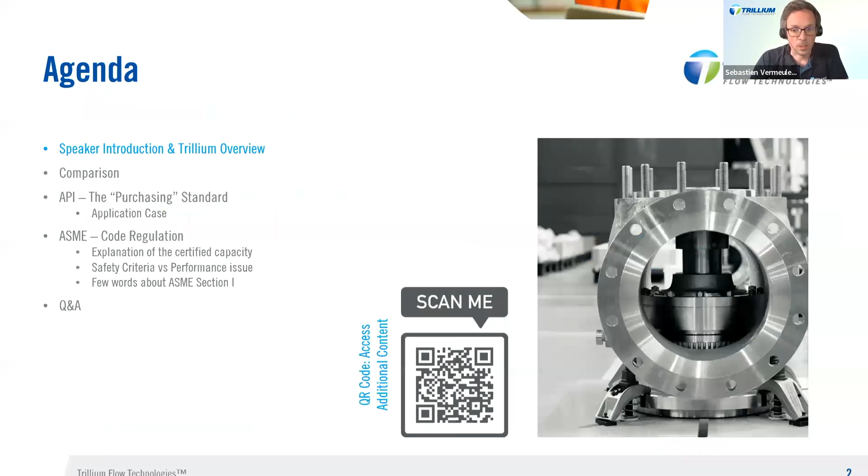After a brief introduction of both of us and the Trillium entity, we will detail the applicable parts and sections of the standard and code applicable for PRVs. We will allow you to get a better understanding of the pros and cons of API. Then Benoit will explain how to pass the National Board Product Certification. To finish, we will close this webinar with our traditional Q&A session.

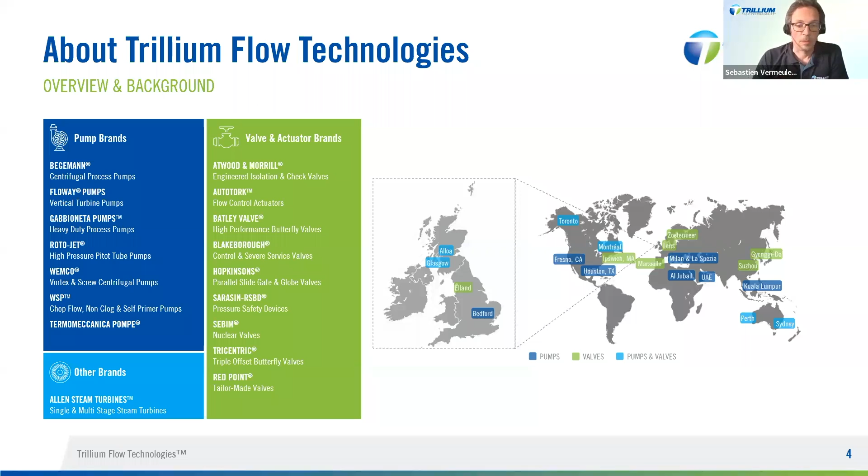Trillium Flow Technology has a long heritage of innovation spanning 190 years. We are continuously adding new products and services to make your process more efficient and productive. Let's take a look at a few of the most important dates for Sarasin. So Sarasin celebrates 175 years of experience this year.

In 1848, the company was created. Mr. Deschamps created a forge mill. Then in 1956, we manufactured our first spring-loaded pressure relief valve in accordance with ASME standard. Our first customer was Total Energy. So yes, there is a kind of French synergy.

In 1983, Sarasin was sold to the US company Anderson and Greenwood, who were the leading global manufacturer of pilot-operated relief valves. It was at this period Sarrazin & Co became Atco Sarrazin and manufactured the Atco pilot-operated pressure relief valve. Another important date is 2013, because we targeted a new market, the power market, manufacturing the first ASME safety valve. It's not the topic of the day, but it was also an important date for Sarrazin.

Trillium probably doesn't ring a bell because it's a new brand, a new group, a name that was created in 2019. Sarasin was part of CIRCOR before, for 20 years, from 1998 to 2018, before joining Trillium. So it's all the same brand, but under a new group name. We made the acquisition of Red Point in 2020, mission critical valves, and more recently, Termomeccanica pumps, who joined the family in 2021.

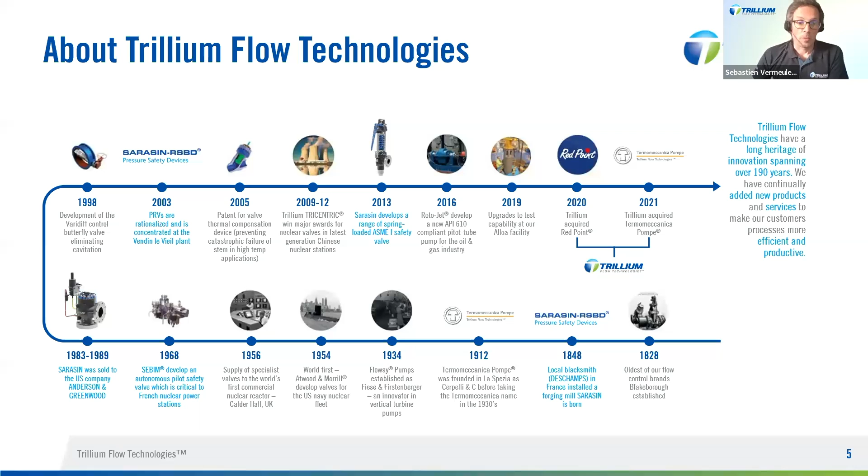So let's detail now the applicable parts and sections of the standard and code applicable for PRVs.

So this is to give you a global overview of the difference between API and ASME, a comprehensive view before going more in detail. In comparison with ASME, the API standards are not mandatory by law and are primarily used in the oil and gas industry, that is to say oil refinery, petrochemical facility, gas plant, liquefied natural gas, LNG.

ASME is not within the scope of API. API is intended to be a supplement, but not supersede the ASME regulation. They are recognized guidelines, and most customers may mandate compliance since API standard may be incorporated in the specification as a reference. Basically, we can say 100% of US EPC require a PRV that comply with API standard. Some other countries simply ignore it.

There are 100 API publications. Of course, during this webinar, we will only focus on those which have a direct impact on pressure valves. In total, there are 4 major ones.

API standard 520, which is split into 2 separate parts: the first part for the sizing, the second part for the installation. API standard 521 gives us estimation of the noise level from the point of discharge to the atmosphere.

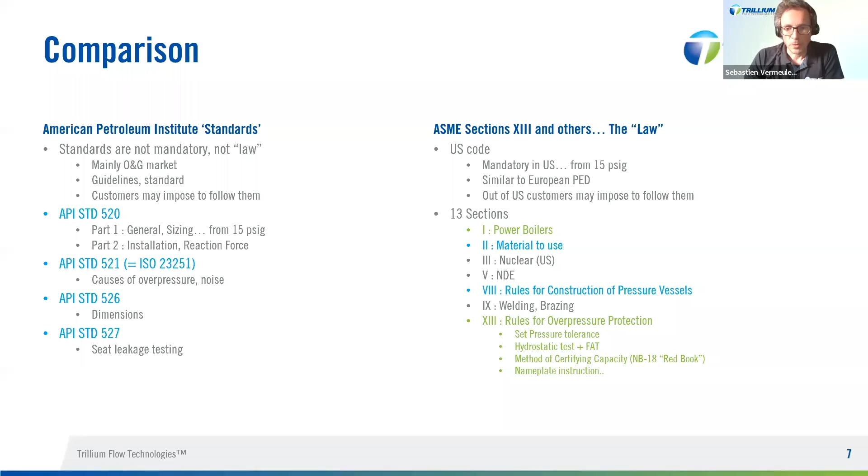Of course, there are other sections around welding and brazing. We don't expect you to know all of these by heart. But we want to reiterate the importance of them as far as the regulation.

So let's move on to API now. Let's highlight together some pros and cons of API. We are going to draw your attention to some essential notes in the API standard we think it's important you are aware of.

The first part, API standard 520 part 1, contains formulas for the proper sizing and selection of safety valves and rupture discs for vapor, gas, liquid, or two-phase fluid. It also gives guidance for preliminary sizing and effective flow coefficient. That's very important, which is a relative measure of a device's efficiency for allowing fluid to flow regardless of any specific valve design.

So in API, we consider, in a nutshell, if you have a perfect nozzle with a fixed diameter, or like a ball valve, and it flows 100% through it with no reduction or inefficiency, it will have a coefficient of 1. That number begins to drop if there are any inefficiencies.

In API, the coefficient benchmarks used include gas, which is equal to 0.975, liquid, which is equal to 0.65 because it's more viscous, and the two-phase, which is equal to 0.85. This coefficient can be used as a general guideline to support you performing a preliminary sizing that is roughly in line with our safety valve relieving capacity.

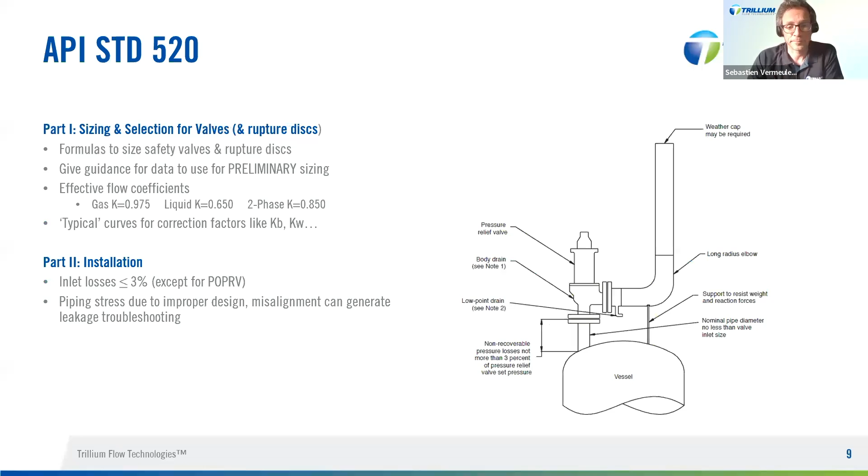So another standard is API standard 526. Again, probably the most important one as it is a purchasing standard. As mentioned, the chart here shows different designations of the different orifices and the valve nozzle.

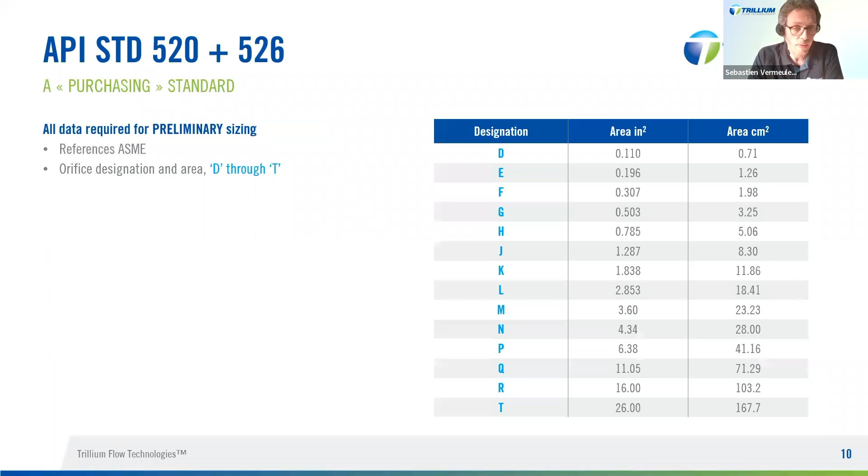Also, this will give you the different inlet and outlet sizes and class configurations that are available by pressure relief valve type. In this example, we have a 4x6 N orifice for spring-loaded that can go up to the 900 class.

There are also center-to-face dimensions associated with this valve. The center-to-face dimensions are split out by spring-loaded and pilot-operated valve, by class. For example, if a competitor has a spring-loaded valve out in the field that is a 4x6, our valve will also meet those same inlet and outlet dimensions, since it follows API standard 526. So most US manufacturers are meeting this standard.

When you get into thermal expansion valves, like the 9 series, not all of them match with the A and B dimension. So a handful of competitors try to match each other so that end users can easily swap out when they need replacement. But it's not the most important cost when you have to adapt a safety valve.

It's not the safety valve itself, it's any piping modifications. So it's very complicated to adapt the center-to-face dimension of the safety valve. And that's the reason there are some crafty competitors that have a solid install base where the A and B dimensions do not exactly match. In that case, it's harder to replace.

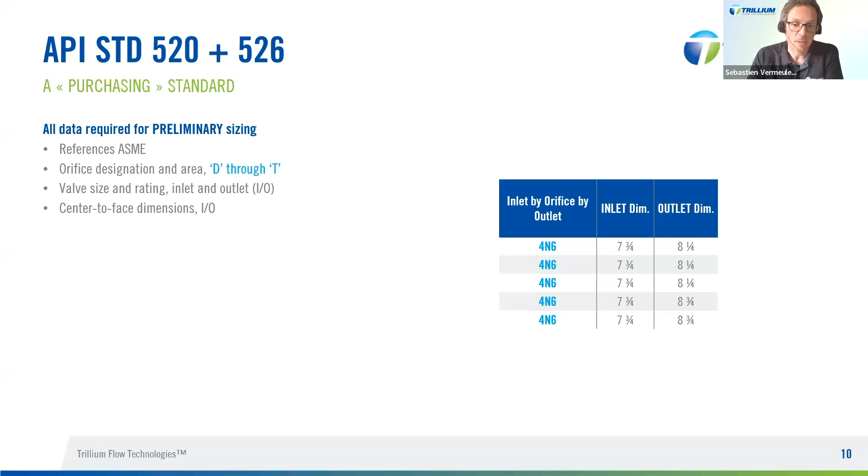In API, we also have a limited number of material selections: carbon steel, stainless steel, nickel alloy, Monel, so basically WCC, CF8M, WC6, M35.1, and CN7M. It's more extended in ASME. We will see that just after.

Here you have a brief comparison of the pressure and temperature limits we can find in API, the 4x6 orifice spring-loaded type versus pilot operated at the bottom of the screen. So each material has its own pressure limit depending on the temperature. But it is interesting to note most of these pressure limits are coming from ASME B16.34, with certain supplement exceptions, the ones under bracket, as you can see on the screen for the 600 and 900 for spring-loaded type.

Where the restriction is coming from the spring itself. So obviously here we can see the pilot offers a higher pressure temperature limit, which is one of the key benefits of pilots.

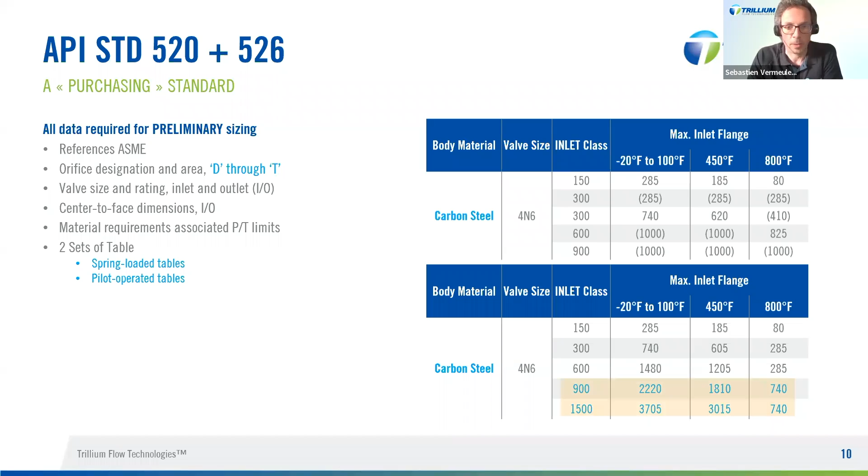So the takeaway is API gives you the effective orifice. The 0.11 square inch for orifice D will be the same if you consider Trillium or any competitor, if you ask us to quote in accordance with API. So combined with API 520, you should have all necessary data needed to make a preliminary sizing. This will give you a general idea of the scope of valve you need and the size you need.

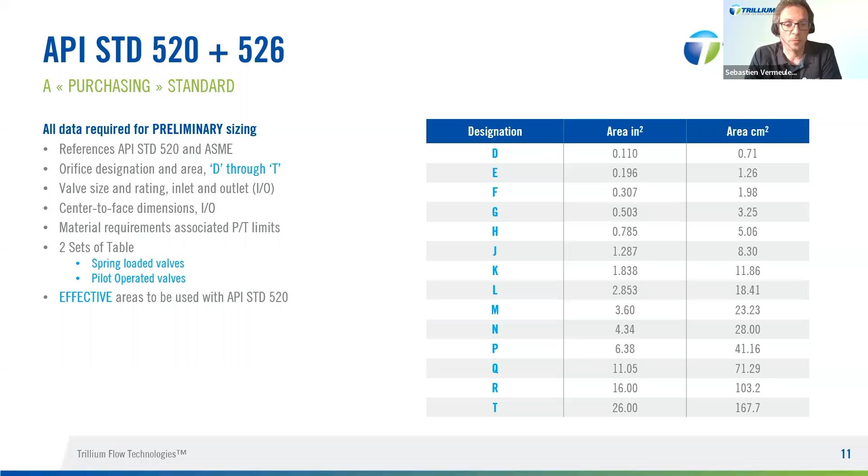This said, the effective orifice area and the effective coefficient of discharge should not be used for the final PRV selection, and we will see this just later.

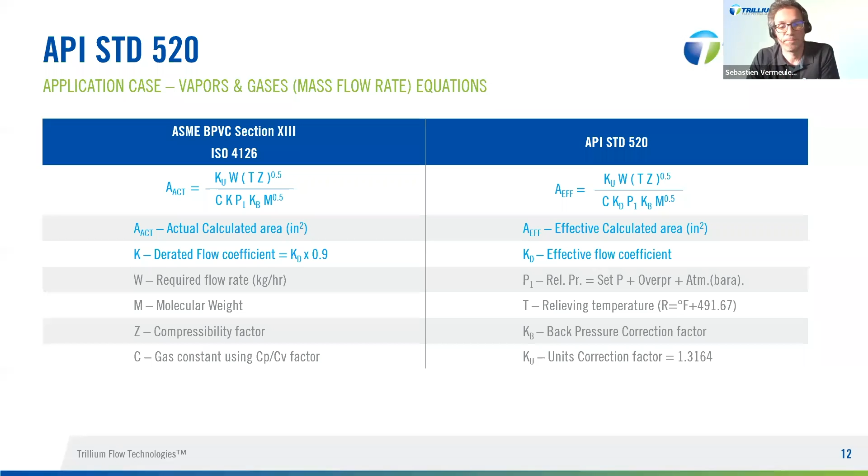Just to give you some color on that, we take an example. So it will be an API calculation. Here we have a gas sizing. Customer asks for 400,000 kilograms per hour. The gas is a natural gas, so we can find the basic data we need: molecular weight, Cp/Cv, compressibility factor, the set pressure and the relieving. We put that in the calculation box, the one we just explained before. Of course, in Trillium, we have dedicated software to do the job. And at the end, the most important is we collect the calculated area. So in that case, the calculated area is 12.74 square inches.

If you take a look at the graph, you have in blue the spring-loaded type, in green the pilot-operated type. So we see immediately the capability of the pilot to operate at a higher pressure limit. This said, if I need to select an orifice, I need to select the next upper orifice. So for that, I need to go with the R orifice, whose size is 16 square inches. It's okay, but we can see also for spring-loaded, the R orifice is limited in terms of pressure. It can only go up to 300 psi, the API version, the cast body.

And if I need to select the orifice that can withstand such pressure, the set pressure being equal to 1020 psi, I need to go to an M orifice. The only issue is now my section area doesn't exceed the required one. So I need to adopt a multiple valve selection. Exactly, if I divide my required area by my section area, I will find 3.5. So I need to go with 4 spring-loaded M orifices to meet the customer requirement, to meet this scenario.

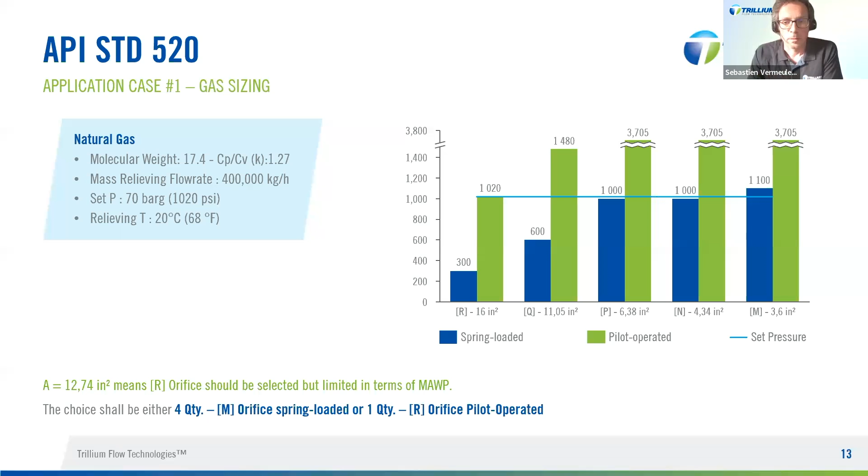It's a lot. Obviously, it's not the only version we can propose. There are different kinds of technology. A pilot can withstand higher pressure, and in that case, I can adopt a pilot. So the R orifice, one single pilot. So it's one of the benefits of a pilot, to reduce the valve quantity and be able to operate at higher pressure. So I will hand over to Benoit, who will also explain the difference if we adopt the ASME sizing now.

Yes, thank you, Sébastien. In this second example, we will compare API and ASME sizing. So on the table, you can see here in the left column, there are API standard coefficients. They are not specific to any manufacturer. They are the same for everybody. And you can note also that the discharge coefficients for spring-loaded valves are the same as for pilot-operated valves.

On the right column, you will have the ASME data. They are the actual manufacturer coefficients and discharge areas. They are specific to the specific design or the specific product range. The discharge coefficients are based on real tests that are performed in ASME representative laboratories. For example, the National Board, as Sébastien said earlier, based in Ohio. On one hand, if you look at the calculated required discharge area, API requires 18.83.

The discharge areas are given in square centimeters here. It isn't changed regardless of the product type, either spring-loaded or pilot-operated, as the discharge coefficients are the same. Competitors will have the same orifice selected, here an API orifice M. API provides preliminary sizing that can be used to prepare, for example, a purchasing specification without considering any specific design

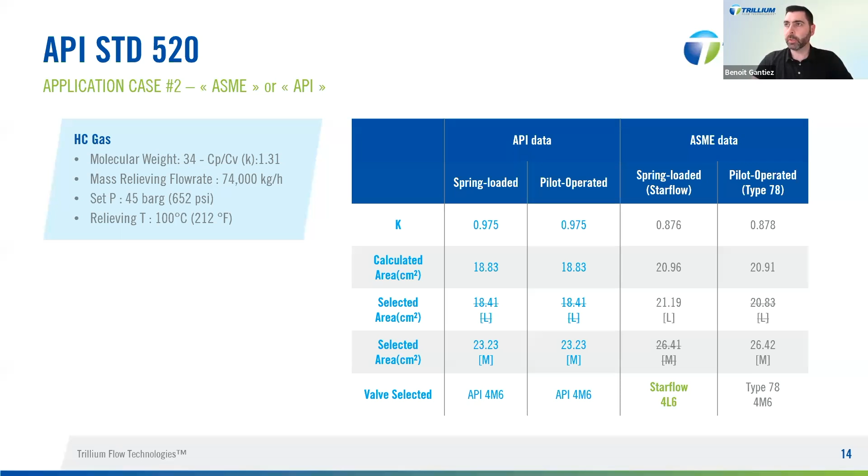Now, we'll talk about the next standard, 527, that deals with seat tightness for safety valves. This standard applies for the three kinds of test media commonly used in our facilities to adjust the valve set pressure. So we use air, we can use water, and we can use steam, depending on which fluid the valve will see in service. The configuration shown on the screen is called a Kellogg test.

It is used to quantify the seat leakage of a valve operating on gas. The test operator plugs the valve outlet with a blind flange or a rubber plug. A tube crosses this flange or plug and brings the seat leakage into a water bottle. The seat leakage is channeled below the water level.

The pressure at the valve inlet is then raised to 90% of the set pressure so that the valve remains closed, and test operators count the number of bubbles created by the seat leakage for 1 minute. So it's a visual indication of the seat leakage. We'll dig into details on the next slide, the allowed air leakage rates per orifice.

For valves operating on liquid, the valve outlet is filled with water above the seat contact, and further leakage is collected during 1 minute. So you can have the total leakage per minute of the valve. For valves operating on steam, the outlet is inspected on a black background so that you can visually see the steam leakage. And also audible leakages are considered non-acceptable for the valve.

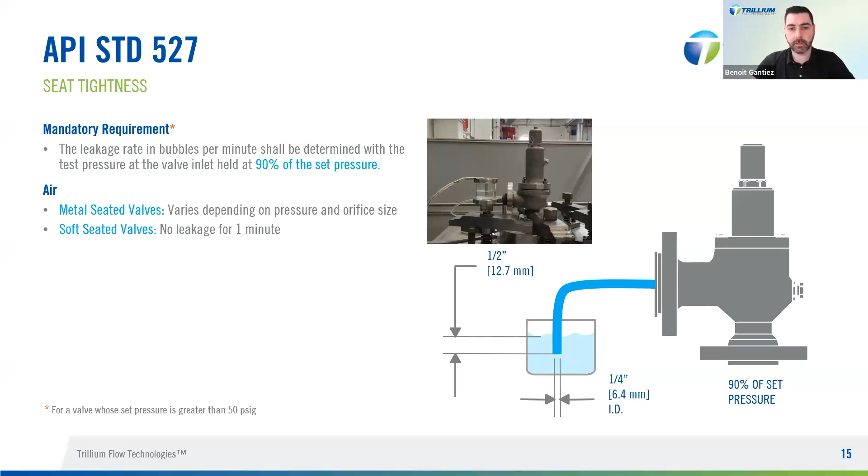Those criteria in API Standard 527 are the same for spring-loaded and pilot-operated valves. We mentioned Trillium is used to comply with the most stringent criteria, which also come from customer requirements. Customers like Shell or Air Liquide, for example, and many others, have their own tightness criteria that can supersede API Standard 527 and can require, for example, helium fugitive tests or leakage tests under cryogenic conditions.

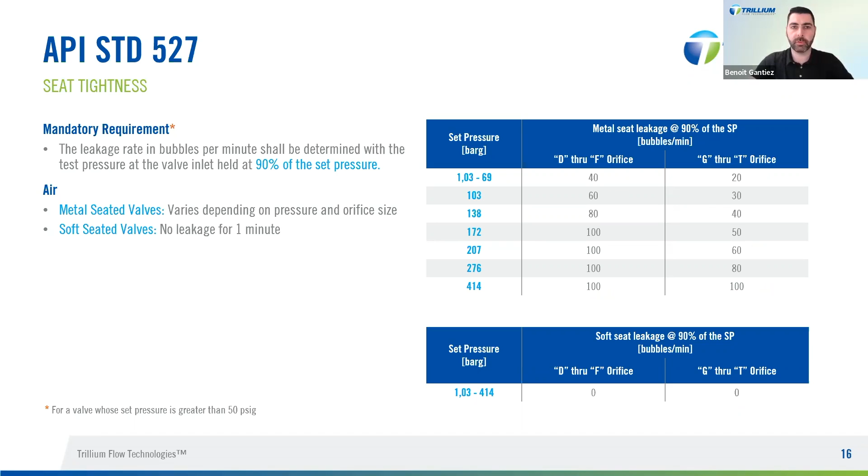On spring-loaded valves, the load applied on the disc decreases with the increase of pressure. There is force equilibrium at the set pressure, so no force is acting downwards at the set pressure. At the API Standard 527 seat leakage test pressure, which as a reminder is 90% of the set pressure, only 10% of the spring force remains on the disc to ensure tightness.

On the contrary, on pilot-operated valves, the inlet pressure is directly on the valve piston, which has a higher tightness area than the disc. This difference in area ensures a greater sealing force along with the pressure increase. At 90% of the set pressure for the seat leakage test, nearly all the available load is applied on the disc. This is why a pilot-operated valve must be considered when tightness is an important criterion or when the user wants to operate the process close to the limits.

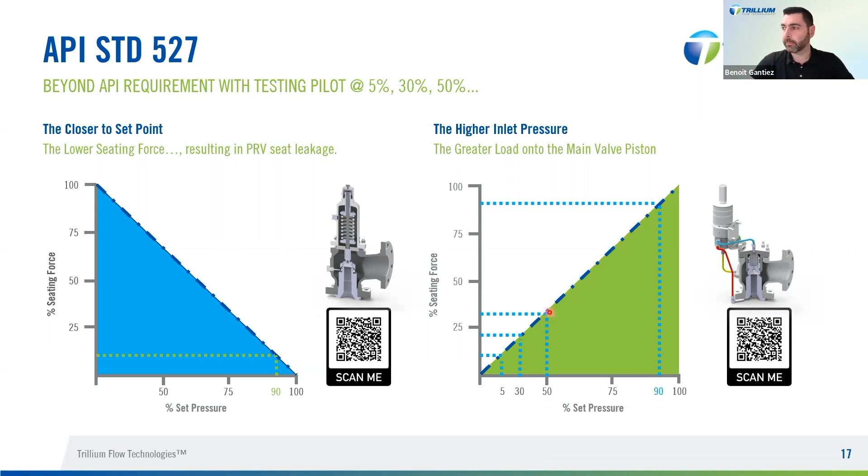Thanks. So let's go into the ASME code now, the code regulation for unfired vessels. We'll talk mainly about Section VIII and the associated National Board product certification. But before starting, we want to talk a bit about ASME I. It's not part of the presentation, it's just a parenthesis, to give you some color regarding the different ASME requirements.

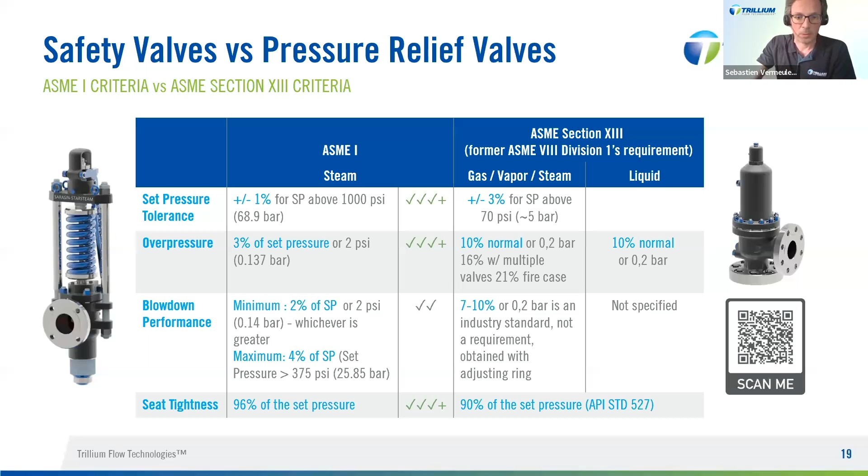So let's go back to the ASME section 8 now. First, we want to differentiate between these two groups, because in ASME, there are two separate groups. The ASME group creates the rules for construction, for pressure vessels, and the regulation around how you should manufacture and test a pressure valve. And on the opposite, you have the National Board of Boiler and Pressure Vessel Inspectors that enforce the law that has been created by the ASME. So the ASME is the law, and the National Board are the cops or the inspectors. They are assessing the valve and whether it complies with the code in place.

As soon as the valve is ASME stamped, it can be in the US, but it can also be worldwide. If a customer in the Middle East asks for a valve which is UV stamped, you need to comply with ASME requirements. Otherwise, you can lose your stamp, and it would be a drama in that case. So the scope of the section 13 valve is only going to apply for valves with a set pressure of 15 psi and over. Under this value, it's simply out of ASME. For PED, it's 0.5 bar.

But the most important is to make sure the valve relieves the right capacity. The valve is first a safety valve. You need to protect the people and equipment. So you need to open at set pressure. You need to release the capacity. You need to guarantee the valve efficiency. The valve efficiency is mainly based on the discharge coefficient factor, how we can get it, how we can guarantee it. Again, in that case, I hand over to Benoit to talk about the National Board product certification.

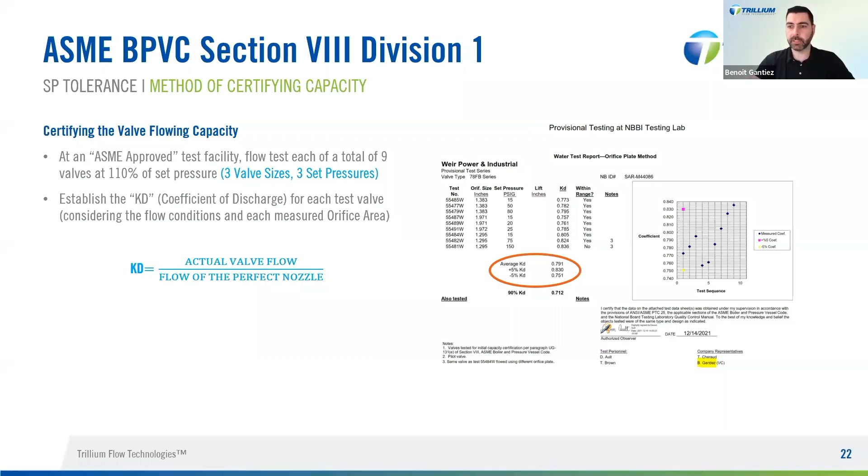So the criteria that are inspected are the set pressure, the lift at overpressure, the stability when discharging, the blowdown, and the seat tightness. And then the valves are tested for flow coefficient in order to establish the discharge coefficient. Back in the initial certification, all valves whose operation parameters are outside the tolerances are rejected, and 2 spare valves must be provided for compensation. Discharge coefficients are then computed, and they shall fall into a plus or minus 5% range over the mean discharge coefficient. Here is the graph showing the 9 discharge coefficients of the preliminary 78 full bore certification.

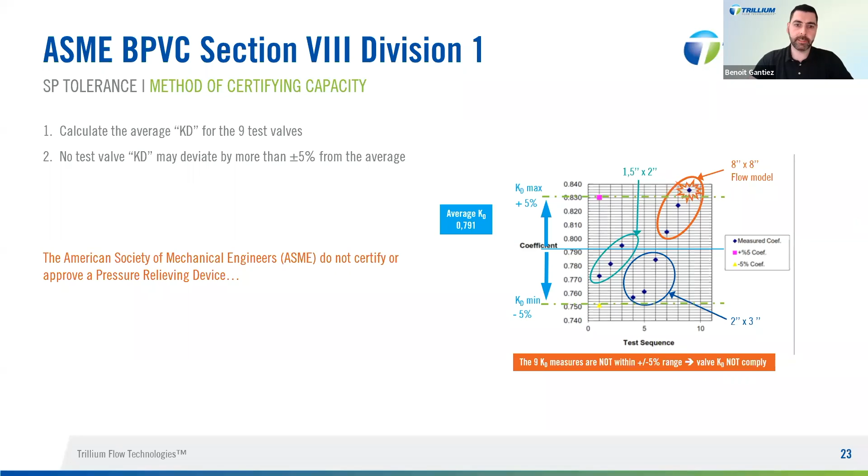The average discharge coefficient was established at 0.791. Any test valve discharge coefficient that deviates more or less than 5% from the average will be rejected. So here we can see that one valve was discharging too much, and it has been rejected at the first try. After orifice modification and test of the new configuration, all 9 valves' discharge coefficients fall into the plus or minus 5% tolerance, and the valve design is preliminarily qualified. After preliminary certification, where prototypes were allowed, ASME requires a production certification, which requires manufacturing at least 2 production valves, and prototypes are no longer allowed.

Those valves are inspected in our facility by National Board inspectors. Then we ship them back into the US for complete testing, for operation and flow capacity. If those tests are compliant, we have the right to stamp the valves. And after the production certification, the actual coefficient of discharge of the safety valve range is published in the National Board Red Book, which is accessible by anyone, either on the internet, or I think you can order it directly on the website.

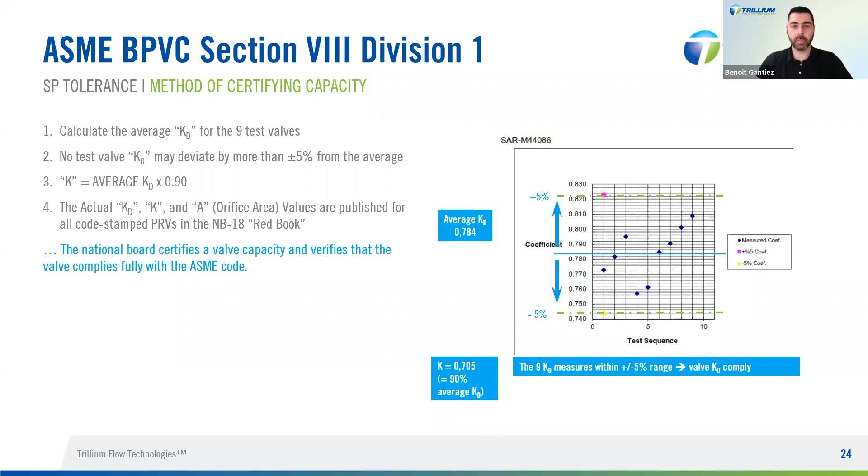Those production certifications are reviewed every 6 years in order to ensure our facility has consistency in manufacturing those valves. So every 6 years, we need to manufacture 2 production valves and ship them to the National Board for test. Here, Sébastien will show you an extract of the Red Book for this safety valve range, the 78 full bore. You can see the name on top of the table, and you will have the certified discharge coefficient value, the test medium that has been used, and all the sizes and orifices that are qualified under this certification.

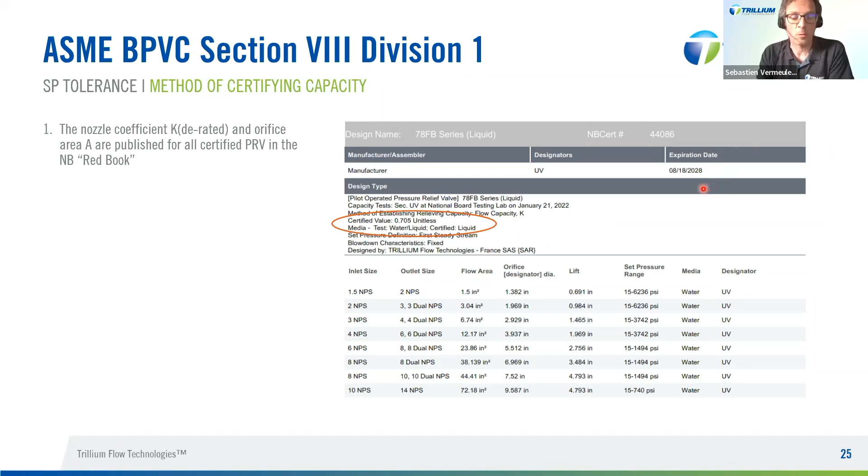The good point is you can get access to any certificate, whether you are a manufacturer, distributor, or customer. Anyone has permission to download this list from the National Board, which is an independent third party. You just need to type NB18 in your search bar, and you will have quick access to this PDF. It lists all the manufacturers' valves with their performance criteria.

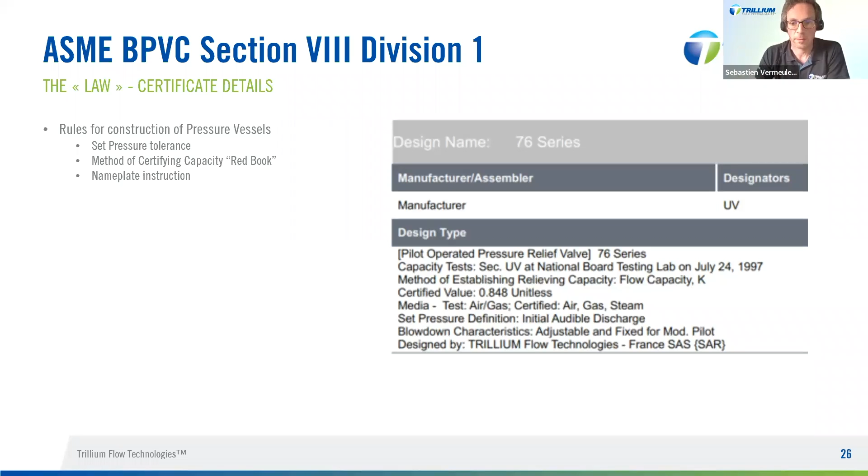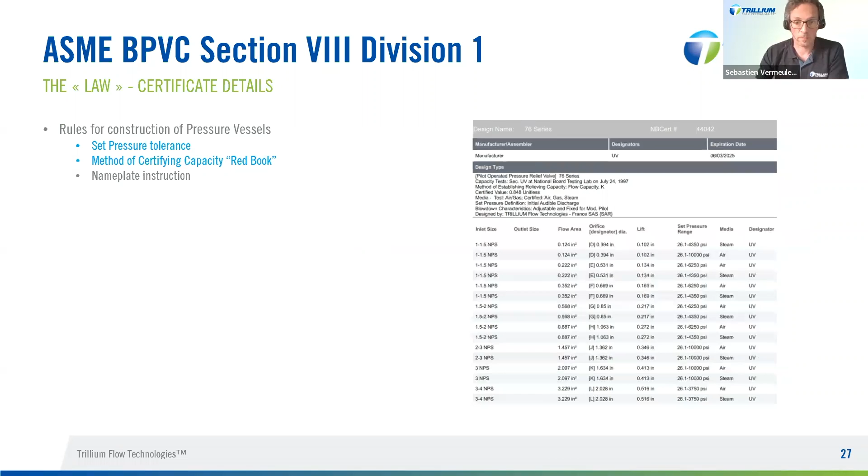So now let's briefly compare ASME versus API. What's the main difference? The first difference: if you remember, in API, when we talk about the effective area for the D orifice, we talk about 0.11 square inch. Here we have the actual flow area. For the D orifice it is 0.124 square inch, slightly higher compared to API. For the other orifice selections, all of them have an actual area which is slightly higher than API.

On the contrary, there is no real valve rating. You can see some inlet size connections, but that's it. So there is no recommendation either for the center-to-face dimension. And we can understand now the primary function of API, which is to rationalize inlet and outlet class per orifice size. It's important also to note the certificate can be updated provided engineering is able to demonstrate an orifice can reach a higher pressure.

For example, here, it's not a typo. If you see a J orifice has a higher set pressure limit compared to the H orifice, it was simply a demonstration from our engineering. One orifice can reach higher pressure for one customer need in the frame of a specific PO. So it's demonstrated by calculation, adopting a forged block. As long as you can demonstrate the body wall thickness is strong enough to withstand the pressure, you can increase the set pressure range of this orifice.

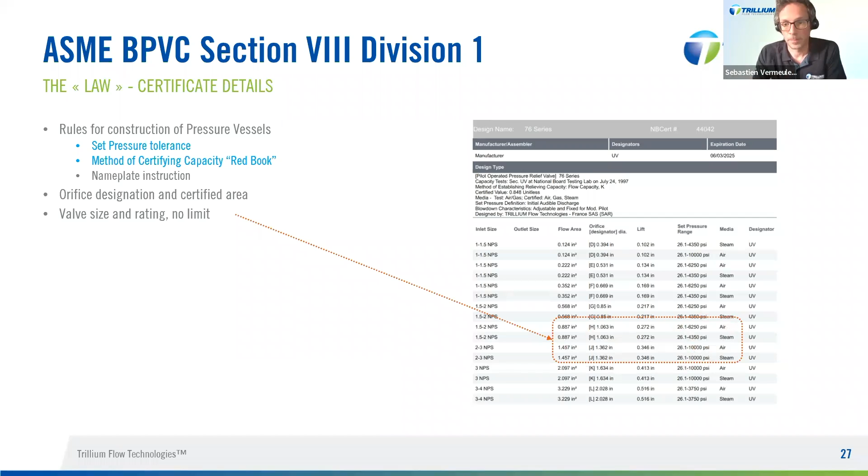So if API Standard 526 is limited, we saw that in terms of material pressure-temperature limits, the information we have in ASME is much larger. And most important, the valve can be UV stamped. In terms of material, that's also a point on API and ASME. API just gives you a rough material estimation. There are 5 materials for a spring valve, 4 materials for a pilot, if I remember well.

On ASME, you have a large list of materials, not as large as we would like. For example, for nickel alloys, sometimes we have to adopt a bar version instead of cast, because ASME does not allow the cast version for 625 or 825, for example. We need to select an alternative nickel alloy. So material selection is critical, and you need to comply with ASME to stamp the valve.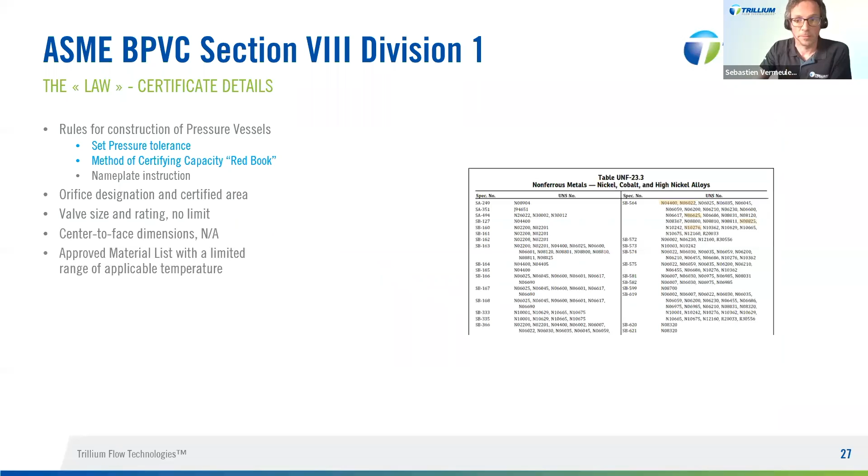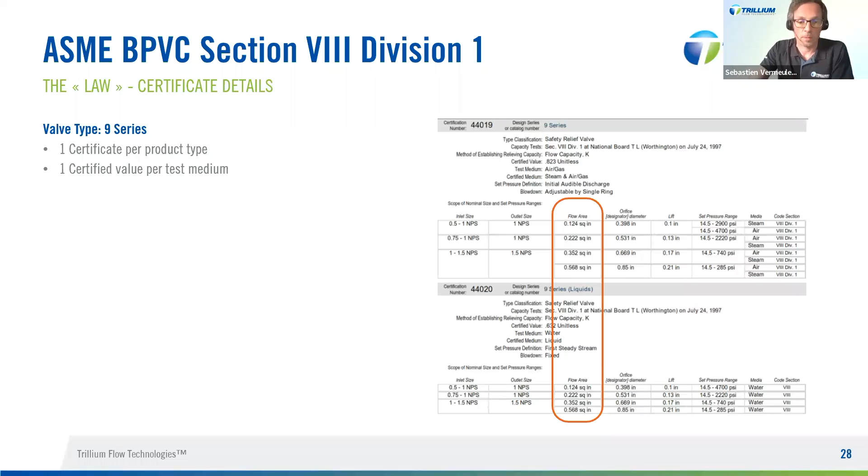Most of the time, for any product, here we have 2 certificates for the 9 series. Each product has 2 certificates, as explained by Benoit: 1 certificate for gas, 1 certificate for liquid. The code authorizes having 1 valve with 1 certificate for gas and liquid, but it's not the most efficient way, because if you comply with both, you need to reduce the derated coefficient factor. So at the end of the day, you increase your chattering risk because you increase the oversizing issue.

Just to give some color regarding the benefit of ASME versus API, why you should get out of API, we take 2 scenarios. This one has been highlighted in the previous webinar about full bore. We just repeat it briefly here, but if you want more detail about full bore, there is a separate webinar available on YouTube.

If you perform any failure mode analysis, you will recognize the higher the number of parts or components, the higher the risk of failure. So if you reduce your quantity, you increase your system reliability and reduce the risk of failure. This is also a concern you should have, not only reducing cost, because if you have 1 single valve for your application, it reduces your TCO and investment, but also in terms of reliability, it's much better.

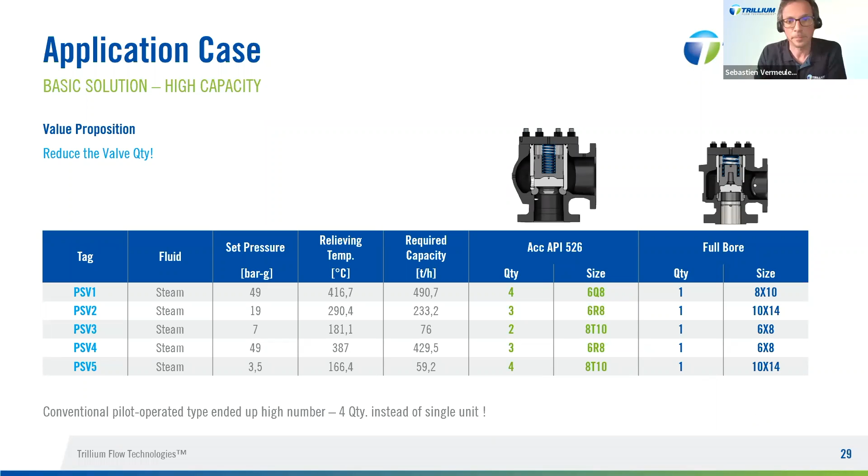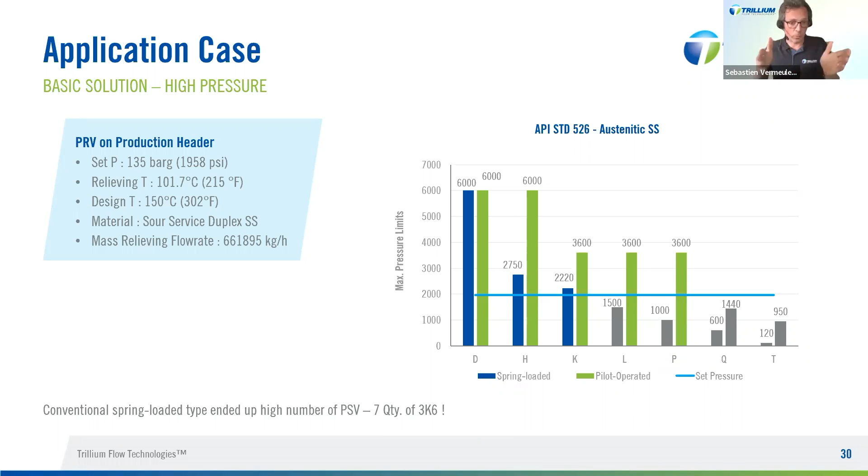In that case, pilot is the first level, but it could be considered as level 1. The level 2 is a forge solution, and in that case, the customer really wants to adopt a spring-loaded type, because spring-loaded also has a limited number of parts. Sometimes the customer is afraid of pilot due to the fitting and tubing that can be brittle, so in that case, he prefers to adopt the spring-loaded robust design.

And we can go on a forge block, the API 6A. So sometimes we have some question regarding the API 6A: can it be UV stamped? The answer is yes. We can qualify it, we can demonstrate to the national board again the capacity of the valve to withstand higher pressure, and in that case be UV stamped.

So we manufacture a valve in the block forge. In that case, it's a special block, and the set pressure is significantly increased compared to the standard body, the API spring-loaded version. And instead of 7 3K6 K orifice, we can go either with 3 M orifice, 2 P orifice, or 1 single block forge Q orifice spring-loaded type.

It's not fair - sometimes we have some question regarding the cost, the final cost. It's not fair to compare one casted versus one block forge. No, you have a scenario, a process - we propose a solution to match with your process.

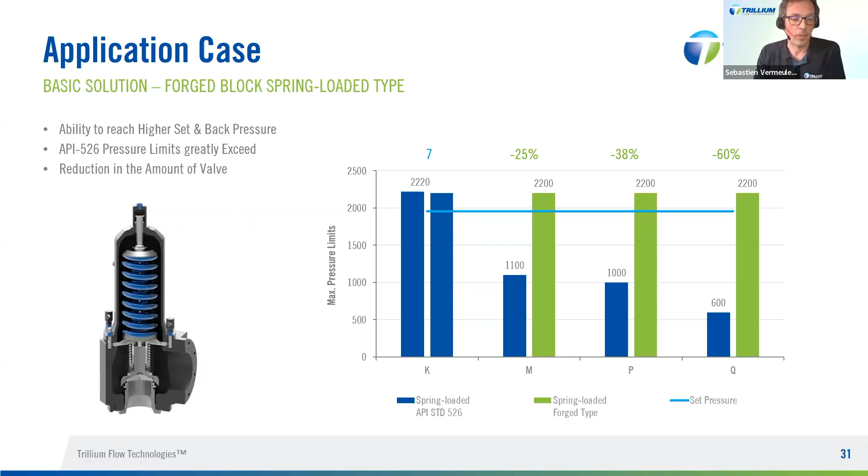So let's conclude now, and let's summarize what we saw together. We saw mainly depending on the project status, it can be FEED or firm. It can be relevant to use API as a preliminary sizing method.

However, it will never supersede the ASME law, which is mandatory for accurate sizing. On a sizing standpoint, you may have to strictly follow API, with its standardized dimension and pressure temperature limit. It will offer you the possibility to interchange with another brand for sure, but sometimes it will increase your TCO considering you may have to select a high number of valves.

On a performance standpoint, there is no doubt solutions can be found to reduce the operational cost, either using forge block that can exceed the API pressure temperature limit, but still meet some standardized dimension, so it's not completely disconnected. Or you can also adopt the compact design, the full bore pilot operated valve, that will have a premium capacity-to-size ratio, and will also limit your TCO.

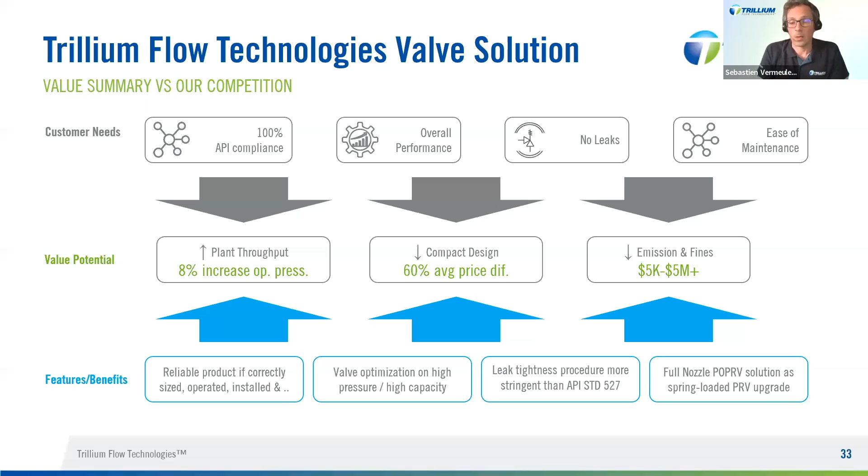For the first question: for boiler steam drum pressure safety valve, should it be 3% or 10% set pressure? I believe you're talking about overpressure. For ASME Section 1 valves operating on drums, it's 3% overpressure or 2 psi, whichever is greater, the maximum of the two is to consider.

But there are some special applications, talking about economizer applications, when they operate only on water, where the overpressure can be raised to 10%, and you can use ASME VIII certified valves on those specific water applications. So for economizers, it can be 10%, but for steam it's 3% maximum, or 2 psi. But for the drum, since the question is very specific and on the drum side, it's 3%. So for steam, it's 3%.

Yes, but it's one of the ASME updates. Now we can use a valve coming from ASME Section 8, so the Starflow 9 series, 76, 78, spring and pilot operated valve, that can be put in the economizer line if the process is only working on water, only water. One question: is a UV stamp a mandatory requirement when buying a new PSV, as a UV stamp is usually an additional charge?